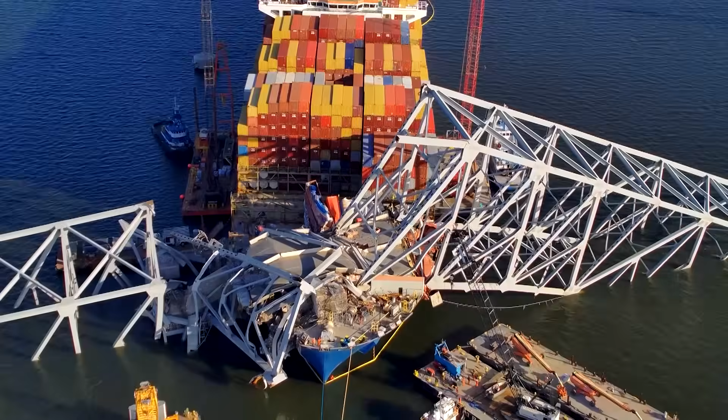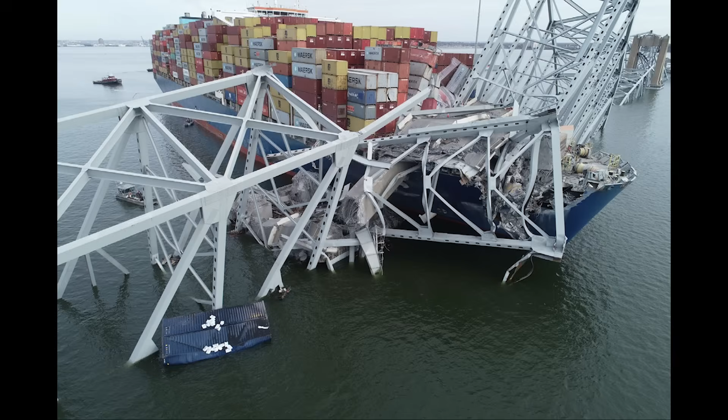It's hard to believe it has been about a year already since the Motor Vessel Dali slammed into the bridge support pier of the Francis Scott Key Bridge in Baltimore, Maryland on March 26, 2024. But people still ask me all the time, what happened to the Motor Vessel Dali? What's its current status? Are they going to rebuild the Francis Scott Key Bridge? It almost seems like a lifetime ago, really.

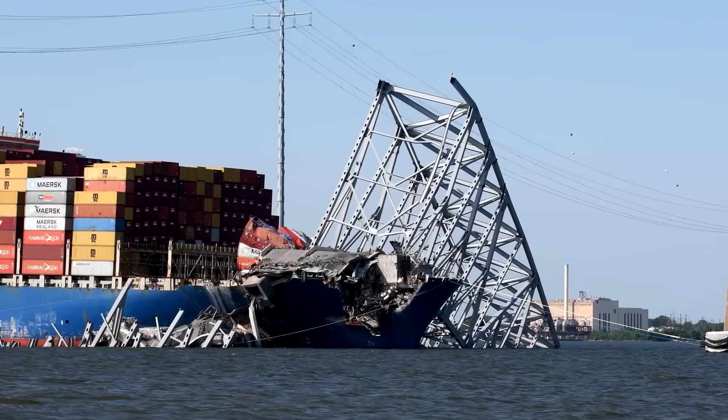First, the bridge came down, and then they spent a month and a half salvaging victims and debris, and then blowing the remaining bridge truss off of the Dali so that they could refloat it.

Hello, look who's here, Dali. This is Louis. Hello, Louis. Dali, this was a great sight to see. So nice to have you back where you belong. I'm so glad to be back. There she is pulling up dockside. You're looking swell. Thank you, Louis. I can tell. Does it show?

So inquiring minds want to know, and I've been getting a lot of comments about this. Today we're going to update three things here. We're going to talk about the Motor Vessel Dali since it left Baltimore, where it's gone and what it's doing now. We're also going to talk about something that came up a couple of days ago. The NTSB had a media briefing and gave some urgent recommendations that affect many other similar bridges right now. Some pretty unnerving stuff in there. We're going to talk about that. And then we're also going to talk about the new Francis Scott Key Bridge. Yes, there is going to be a bridge, and they are rebuilding it. We're going to talk about the design and what's going on right now.

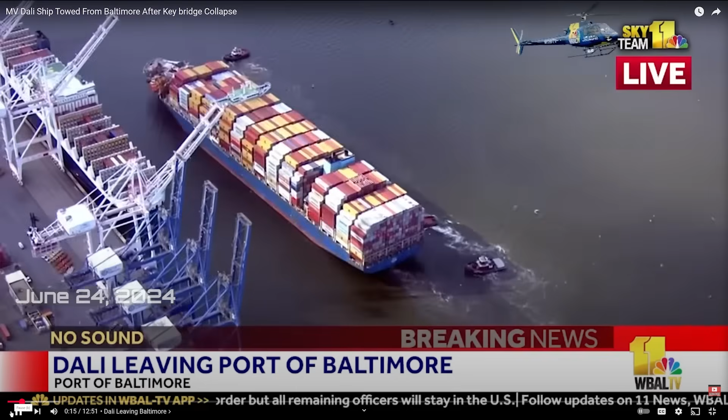Now, as you might recall, the last time most of us saw Dali was on June 24th, 2024, as you can see here, when the Motor Vessel Dali was being towed out of the port of Baltimore. It was going to sail down to the port of Norfolk, Virginia, where it was going to be put under dry dock for some repairs before eventually limping its way to China for a complete rebuild of the damaged section. Right back into the middle of the channel where it all began, where she crashed into that left side bridge pier that was supporting the bridge to begin with.

See, it's just about there now. That tugboat that's pulling it — look right above it, and you'll see the remnants of that bridge pier just sticking up out of the water. Then a few hours later, Dali approached the Chesapeake Bay Bridge. Here's the footage that was captured by Washington, D.C.'s Fox 5 channel from their helicopter. And look at this, another beautiful sunny day out there. Here it is — I sped it up for you as it made it perfectly under the bridge there without incident.

So then the Dali ship, while it was sitting there in dry dock in Norfolk, Virginia, had many of the containers removed, and it was getting prepared to be moved to China. It left for China in September of 2024. Here you can see it on September 19th, 2024, after it was leaving the port of Norfolk, and it was heading over to China. I hope I pronounced this right, because it was heading to a shipyard called Fujian Huadong, in the Luoyuan Bay port area near what they call Fuzhou, China. I hope I pronounced all of that right — forgive me if I got it wrong. But that's where it went to, and it arrived there on November 13th, 2024.

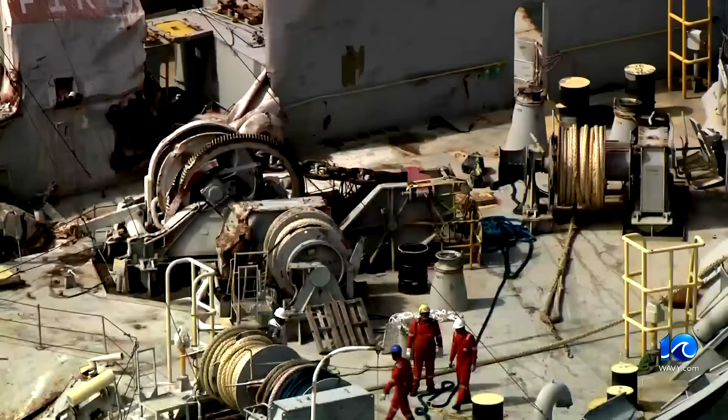Dali looked much emptier than it did three months ago with a bridge sitting on top of it. Holy cow, what a difference a few months makes, huh? So there it is — some close-ups of some of the damage there without the bow covered. You remember the last time we saw it, it had the bow covered. So you can see how twisted and mangled everything is. And man, does it look like a completely different ship without all of those containers. Look at all the damage on the deck. And there she goes — I mean, she's rusting and everything.

So here you can see on January 12th, 2025, it departed the Fuzhou shipyard to go ahead and begin its sea trials. Pretty impressive that they got it done that quick. This video was provided by the Synergy Marine Group, who manages the Dali, and they're based in Singapore.

Now, of course, we know that the insurers settled for $102 million last fall with the federal government. And I'm sure there's still a lot of people now that are suffering that are never going to see a penny from this. So I think the Dali should set aside maybe 5% of their earnings for the foreseeable future until such time that they can pay back all of these victims, like pay into some kind of a super fund or something, in perpetuity even, until everybody has been satisfied. I think that would be the fair thing to do.

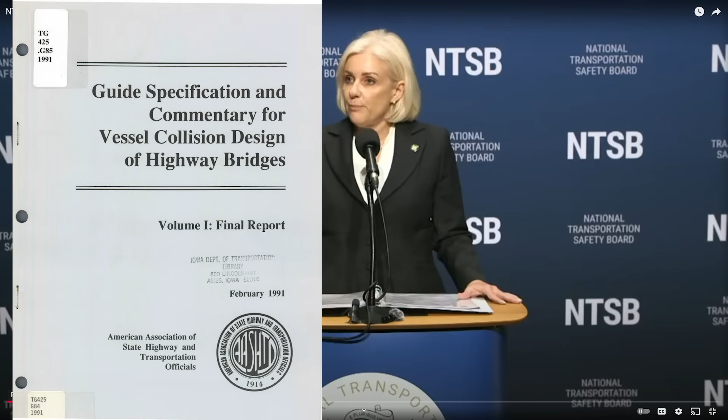State of Maryland was on AASHTO's executive committee at the time and served on AASHTO's highway subcommittee on bridges and structures, which developed those standards in 1991 and revised them in 2009.

Included in the 1991 standards was a recommendation from AASHTO that all bridge owners conduct a vulnerability assessment of existing bridges to evaluate the risk of catastrophic collapse in the event of a vessel collision and take action. All remaining existing bridges over navigable waterways with commercial barge and ship traffic should be evaluated using a vulnerability assessment in accordance with risk analysis procedures contained in this guide.

The Maryland Transportation Authority never ran the calculation on the Key Bridge, and as of October 2024, they still haven't on the Chesapeake Bay Bridge.

Had they ran the calculation on the Francis Scott Key Bridge, the MDTA would have been aware that the bridge was almost 30 times greater than the risk threshold AASHTO sets for critical essential bridges.

30 times greater. What's frustrating is not only did MDTA fail to conduct the vulnerability assessment on the Key Bridge, they did not provide, nor were they able to provide, the NTSB with the data needed to conduct the assessment. We asked them for that data. They didn't have it. We had to develop that data ourselves.

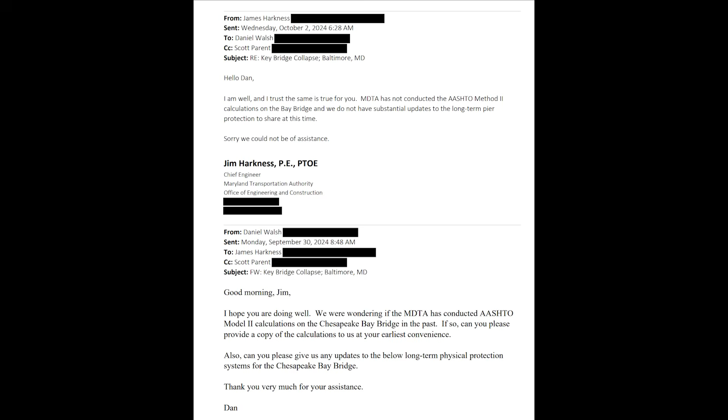Now here's an email that I dug up from the docket, and it shows where the NTSB had requested all of that information from the Maryland Department of Transportation, and their response was that they did not have it. That was some pretty scathing criticism there of the Maryland Department of Transportation, and that puts a lot of blame on their shoulders.

So with all of those engineers there, and I know they're busy, they all have jobs to do, but it's like, so I'm like, okay, what do you guys do all day long there then? What would you say you do here? Well, look, I already told you. I deal with the damn customers so the engineers don't have to.

Okay, so what NTSB Chair Homendy was referring to here is this guide, from the American Association of State Highway and Transportation Officials, otherwise known as AASHTO. That's what we call it in the engineering world. They have rules and regulations on what you need to do when designing bridges. This is a guide, specification, and commentary for vessel collision design of highway bridges.

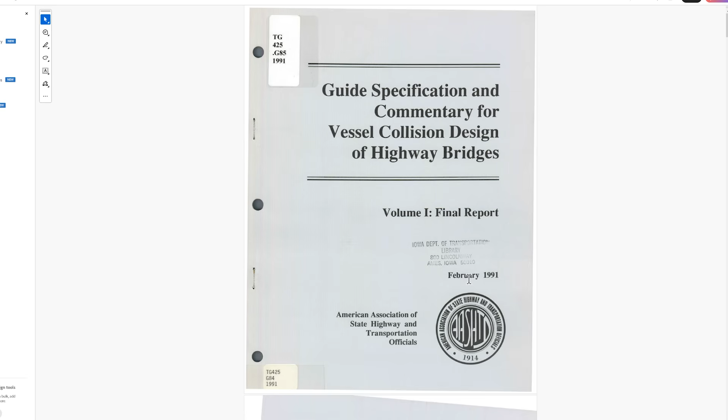This is the version that came out in 1991. There's a later one from 2009 that was updated, but I didn't spend the $162 on it since you have to buy the download. So this is just an older version I found online.

But at least in the 1991 version, if you come down to page 25, this is where it shows the methodology to determine if there's a risk of a bridge collapsing from a vessel collision. It's called Method 2. This is the number you're after, 4.8.3, the annual frequency of collapse, or AF. This is what the NTSB said was 30 times higher for the other bridges.

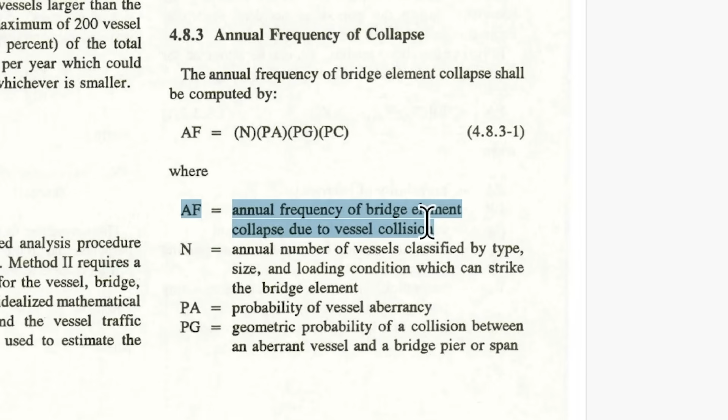Let me show you the definition of AF: it's the annual frequency of bridge element collapse due to vessel collision. This is essentially a prediction of how often you're likely to have a collapse when a boat collides into your bridge, like we saw with the MV Dali when it crashed into the Francis Scott Key Bridge.

So it would have fallen under this calculation, and had they run it, they would have seen ahead of time that this was going to happen. This is similar to if you've bought a disk drive before and looked at the sticker - it'll say something like MTBF, mean time between failures. That's a gauge of how reliable your disk drive is and how often they expect a failure mode to set in. It's similar to that.

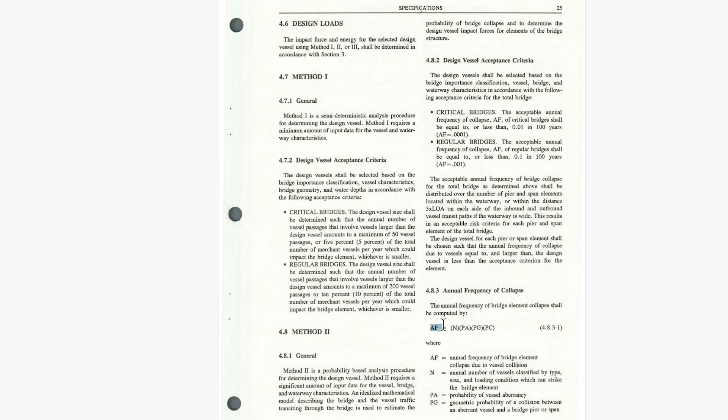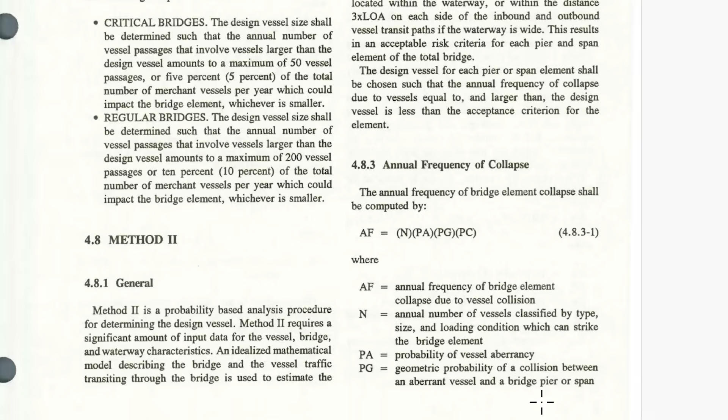They give the formula for how to calculate this annual frequency, and here are all the inputs: the annual number of vessels classified by type, size, loading, probability of vessel aberrancy, geometric probabilities of a collision. There's all sorts of parameters you figure out, but they give you all the formulas needed. This is exactly what NTSB Chair Jennifer Homendy was telling us - that the Maryland Department of Transportation never ran these tests on the Francis Scott Key Bridge.

Not only did they not run the test, they didn't even have any of the data to give to the NTSB to run these tests, so the NTSB had to run their own tests and do the calculations themselves.

You're likely to see this in a lot of states because this came out of nowhere. It caught everybody by surprise - when the Panama Canal increased in size in 2016, suddenly you're getting, pun intended, boatloads of newer ships much larger than the ships of old, than what we had 30, 40, 50 years ago. So all the owners of these bridges need to come in and rerun these calculations based on the new traffic and new boat sizes.

All the owners of these bridges need to rerun these numbers based on the new ship traffic and the size of these behemoth container ships. Some of them can contain almost 30,000 containers, when the average used to be really small, just a few thousand. On March 18th, 2025, the NTSB held a press conference giving urgent recommendations.

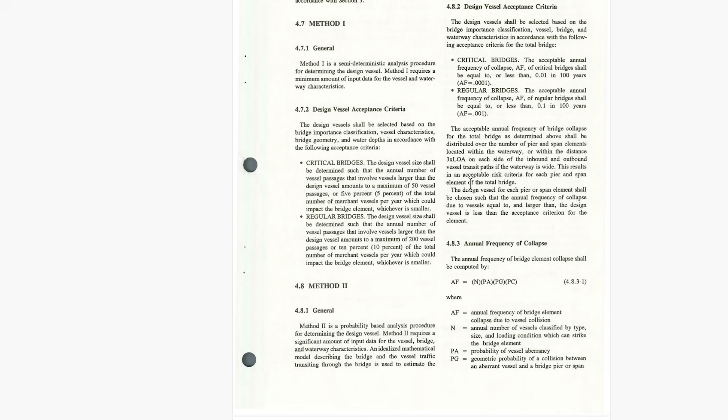The title says it all: Safeguarding Bridges from Vessel Strikes, the Need for Vulnerability Assessment and Risk Reduction Strategies. So basically she's saying they're identifying bridge owners who didn't adhere to the AASHTO specifications and didn't come in and run this annual frequency of collapse calculation.

In their marine investigation report to date - this is not the final report - on the MV Dali collision with the Francis Scott Key Bridge, here are the four piers and the protection dolphins they had put in. As you can see, just looking at the pictures, they always looked too small and inadequate for protecting the bridge.

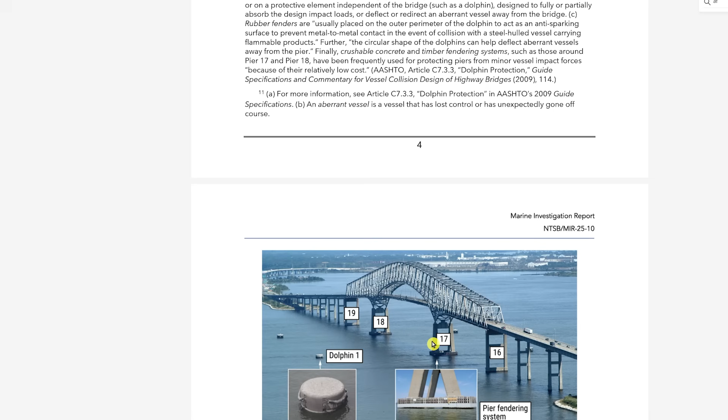And of course, the fendering system didn't do so well either, because with some of these bigger behemoth ships now, the bow can extend way out beyond the bottom of the hull where it meets the water. So you can have these big overhangs that can still come in and destroy a pier.

And here is the overhead view that they showed. Remember when the Dali had crashed into the pier right here, Pier 17? If you look where the Dolphin is, it's 489 feet away from it, and it didn't even stop the ship because the ship never even hit it.

So it was useless. There wasn't enough in place to stop Dali from crashing into Pier 17 right here. And then here's the Fort McHenry Channel, carved 50 feet deep right in the middle of the Patapsco River. In this case, it looks like the MV Dali had pretty much threaded the eye of the needle and scooted right by Dolphin number 1 to hit that pier.

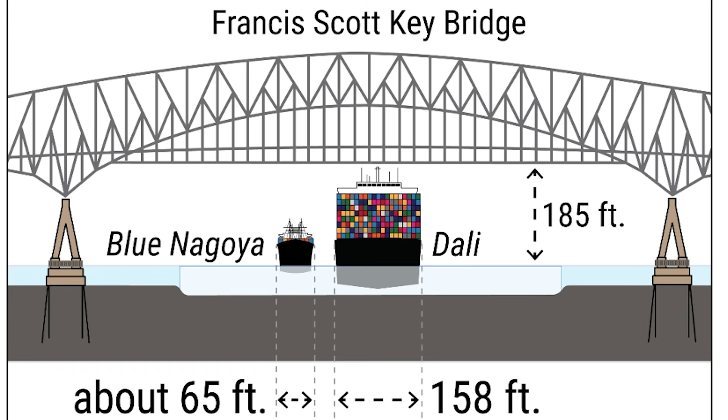Many people might not be aware that in 1980, this ship right here, the Blue Nagoya, had crashed also into Pier 17 at the Francis Scott Key Bridge. But look at the size of the ship here from 1980 compared to the Motor Vessel Dali, what we have today with today's behemoths. And guess what, folks? Dali is not even one of the biggest ships out there. There's plenty of ships much bigger than even Dali.

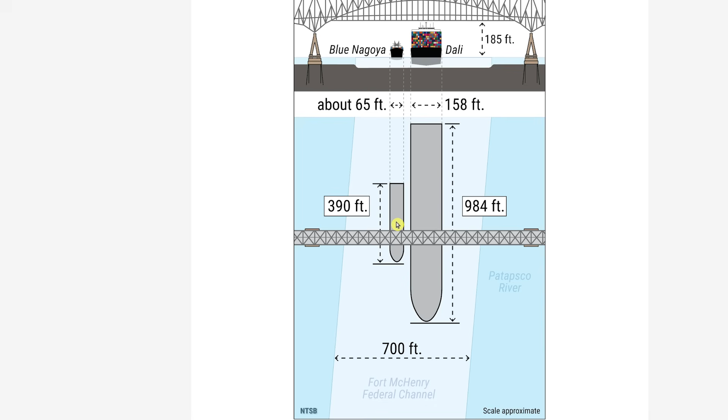But look, here's the length of the ship from 1980. It was 390 feet compared to the Motor Vessel Dali right here, which is 984 feet. Just looking at the Fort McHenry Channel, look how much space the Blue Nagoya takes up here compared to the Dali. It's like, man, it's almost like just being on a dinghy.

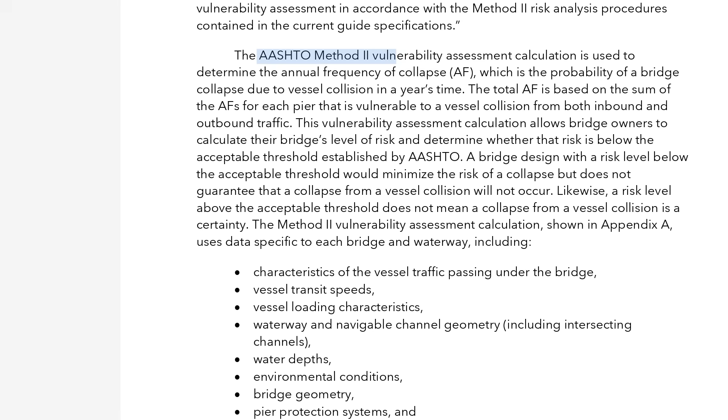Now the NTSB's report kind of just repeats what I was just mentioning a minute ago. So you have the AASHTO Method 2 vulnerability assessment calculation used to determine the annual frequency of collapse, AF. These are all of the inputs that go into all of those equations here, see? That's what the individual bridge owners want to do, is take a look at all of this and generate those risk assessments based on these equations.

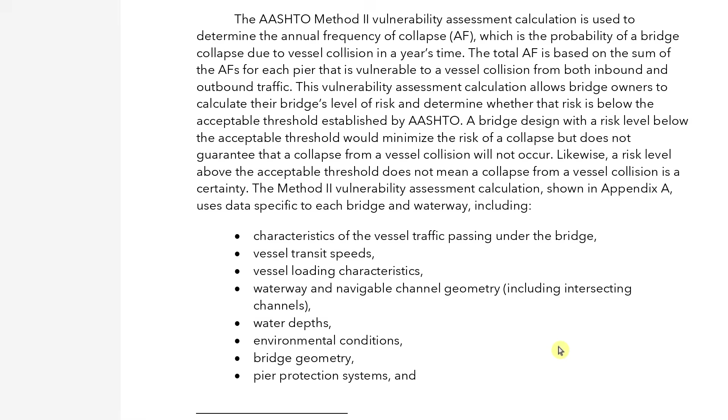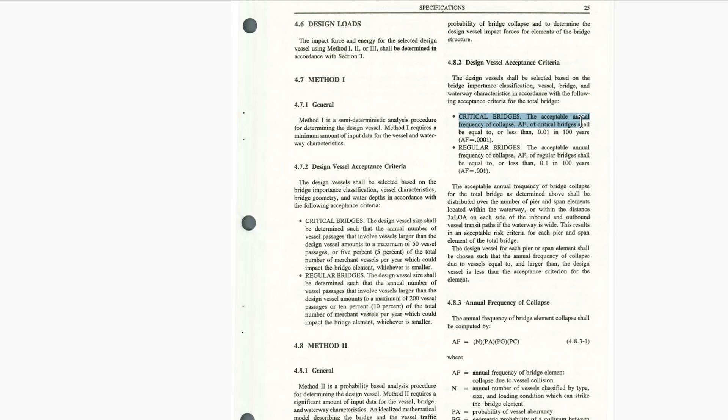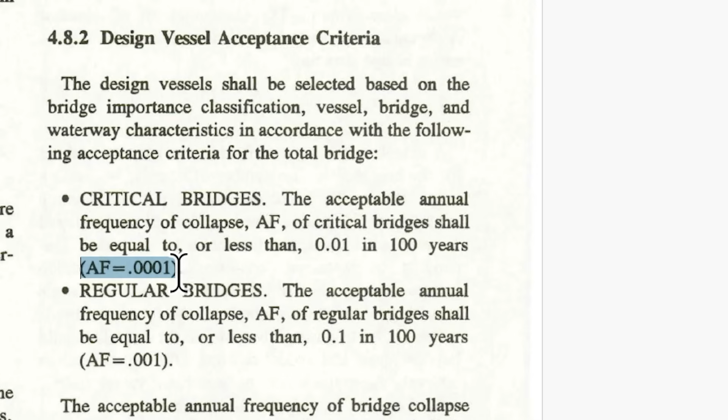A key point they pointed out is that bridges built before 1991 were not required to undergo this vulnerability assessment. So of course, Key Bridge, being built in 1977, didn't have it. Now this is in the AASHTO specification here. It says the acceptable annual frequency of collapse, AF, of critical bridges shall be equal to or less than 0.01 in 100 years. This means we are looking for an AF equal to 0.0001 or less. So that's all we have to do, is make sure it comes in below that.

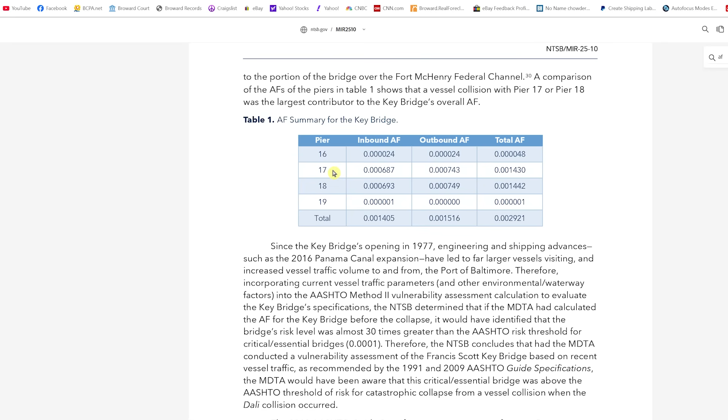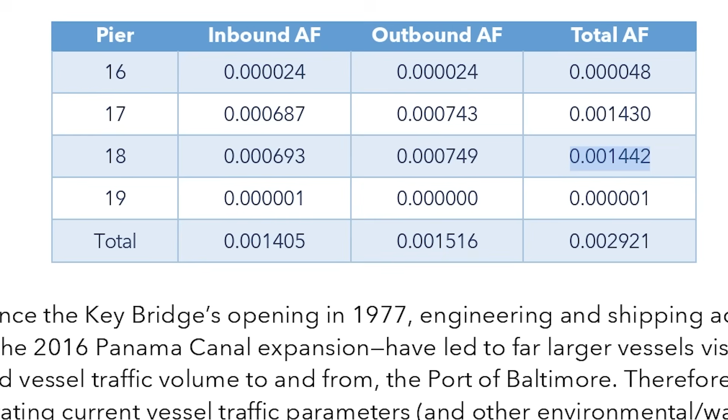So the NTSB published this week the data they calculated for the Key Bridge under these different piers: Pier 16, 17, 18, and 19. Here's the problem. Your total at Pier 17 and Pier 18 is 0.001430 and then 0.001442. And remember, this right here is supposed to be 0.0001. So that's what they were talking about.

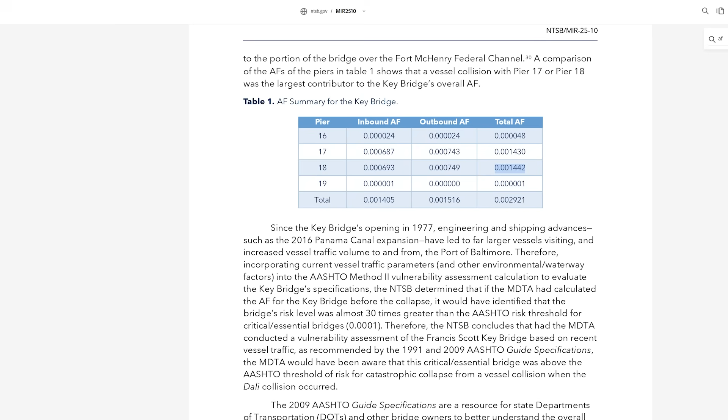Now if you were just some pencil pusher looking at this chart of numbers, you wouldn't even see anything pop out. But you have to know that this number right here is way, way above by many, many magnitudes of what it should be. That's the alarming part. They should have put this in bold and red, these 2 numbers right here, this one up here as well.

And so that's where they're saying right here that the NTSB determined that if MDTA had calculated the AF for the bridge before the collapse, it would have identified that the bridge's risk level was almost 30 times greater than the AASHTO risk threshold of 0.0001. That's what I just showed you on the spec a minute ago.

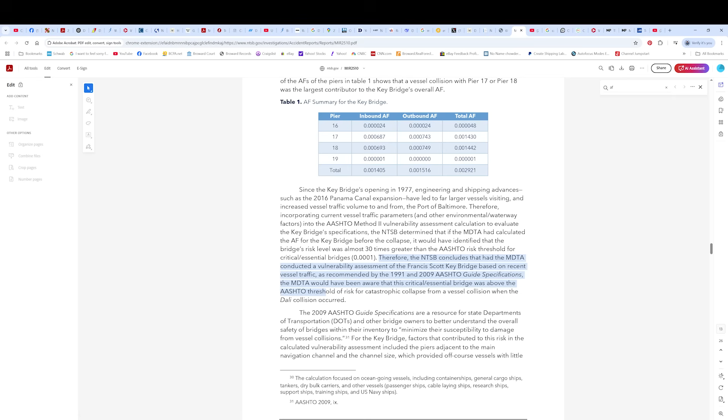So it says here, therefore, the NTSB concludes that had MDTA conducted a vulnerability assessment, they would have been aware that this critical essential bridge was above the AASHTO threshold of risk for catastrophic collapse from a vessel collision when the Dali occurred. So what the NTSB is saying now is that the Maryland Department of Transportation should have known that the Francis Scott Key Bridge had an issue, that it was at risk and overdue for a collapse, statistically speaking, and that they should have been able to do something about this. This is part of the reason why we're in this position today.

The 30 owners of 68 bridges over navigable waterways frequented by ocean-going vessels are likely unaware of their bridge's risk of catastrophic collapse from a vessel collision, and the potential need to implement countermeasures to reduce the bridge's vulnerability.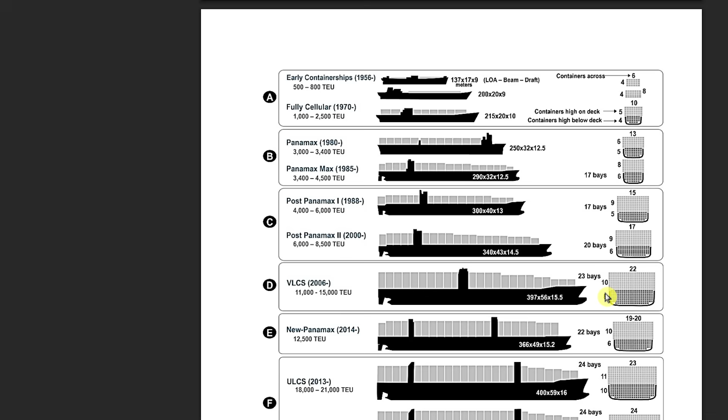And look at this, the MV Dali falls under this category right here, the new Panamax. As big as the MV Dali ship was, folks, guess what, there's still two classes more up. And I thought I heard there was another class they've come out with even beyond this one. I have to find out, dig more into that. But this kind of gives you an idea for just how big.

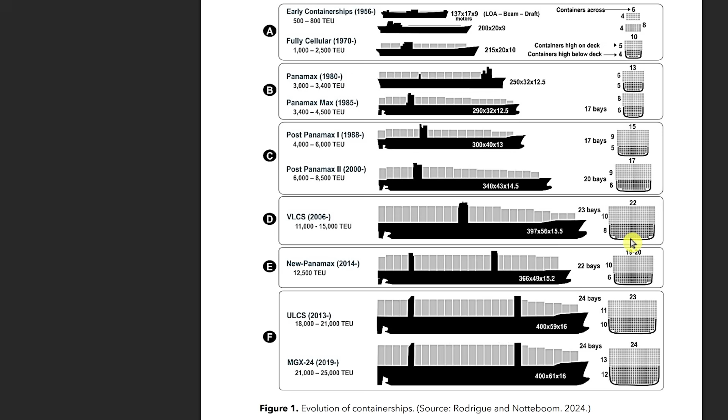Remember, mass times velocity, that's your momentum. M1v1 equals M2v2, remember that formula from physics? I remember going through that formula when I was a senior in high school. A big boat like these are going to pack a lot of momentum when they crash into a pier. And this is why, in my opinion, the best way to stop a behemoth like that is forget about trying to bolster up the piers themselves. I think it's going to tear through no matter what.

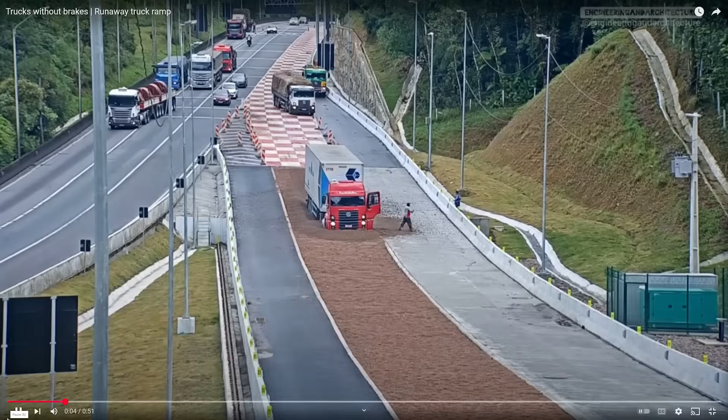You've got to stop the boat from ever getting to the pier, either with massive dolphins or you create a big beachhead around it so that if the boat's going to come in, it's going to hit the beachhead instead. Kind of like those trucks that go up those runaway ramps, like in Colorado when you're going out skiing, you'll see these trucks sometimes run out of control and they'll go up a runaway ramp, which is basically a bunch of rocks that help slow it down.

Also, they could form the seabed underneath the bridge, right? You could form it so that the ship would just sort of beach itself underwater even without having to build a whole bunch of rocks up on top as well.

Okay, so let's take a look at this list that the NTSB put in the appendix. These are 68 sort of well-known bridges that have not been assessed and need to be assessed to determine if there's anything wrong. That's why they have the classification on here as either typical or critical and essential. And here's a bunch in California.

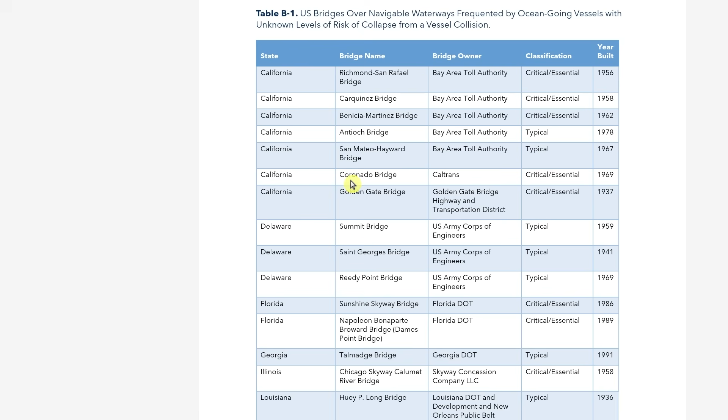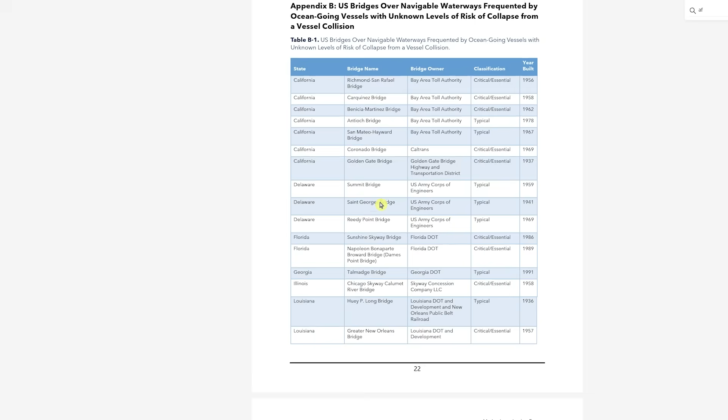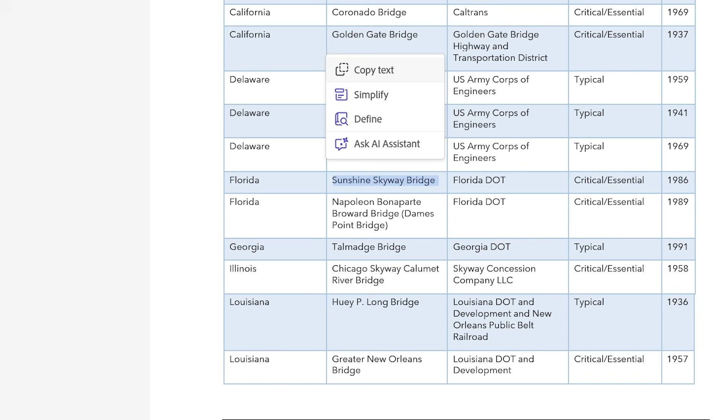But anyway, here's some of the other ones. And this one surprised me here in Florida, because here's the Sunshine Skyway Bridge. Now that doesn't mean that it's in danger of collapse or anything, it just means that these are all major bridges that were built before 1996. And anything before 1996 is suspect, because now we don't know what protection is around it. And a lot of these massive ships that have been created over the years have gotten much, much bigger since the 1950s, 1960s, and 1970s.

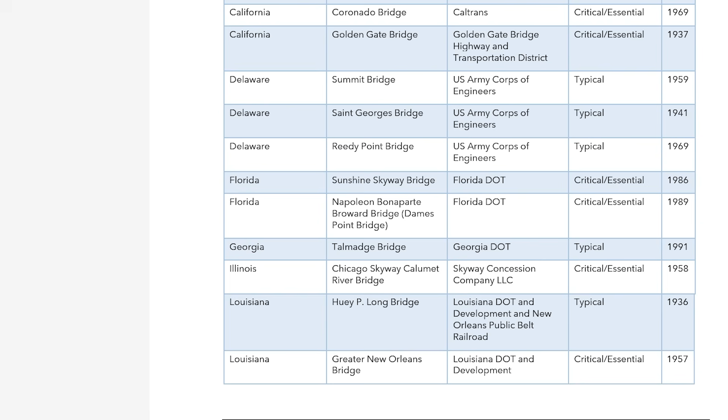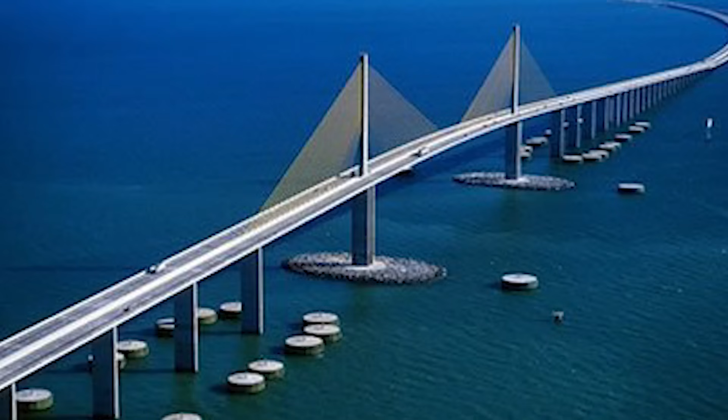I profiled this Sunshine Skyway Bridge last year during several of my videos on the MV Dali collision with the Francis Scott Key Bridge there in Baltimore. And you remember I used it as the gold standard because of the way they had all of those dolphins arranged, and the way they have all of those rocks creating like a little beachhead to prevent ships from colliding into any of their pylons there. It'd be interesting to see what their calculations come out to be. And then as you go down here into the other states, you can see others like Louisiana, Maryland.

Now here in Maryland, the Bay Bridge hasn't been done yet either, and that's the one that was real critical that they were talking about at the meeting, the Chesapeake Bay Bridge.

And then in Massachusetts - oh, that's my home state. I'm from Boston. And look at this, man.

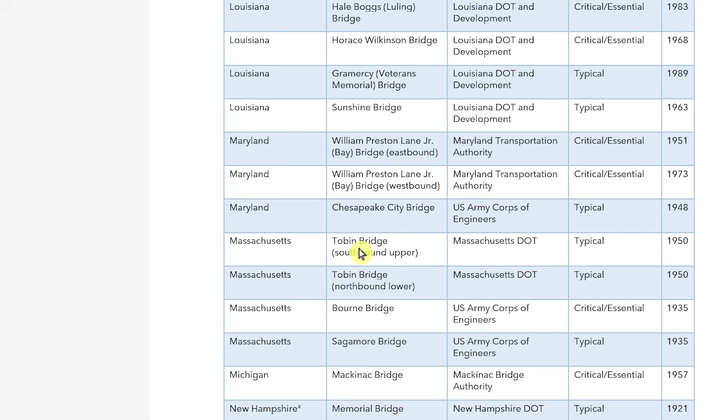The Tobin Bridge in Boston, north and southbound. You got the Bourne Bridge and the Sagamore Bridge, which connect Cape Cod over the canal to the mainland. If those bridges go down, I can't even imagine how bad life would be. So looking at this list, it looks like the NTSB is giving Massachusetts an ultimatum.

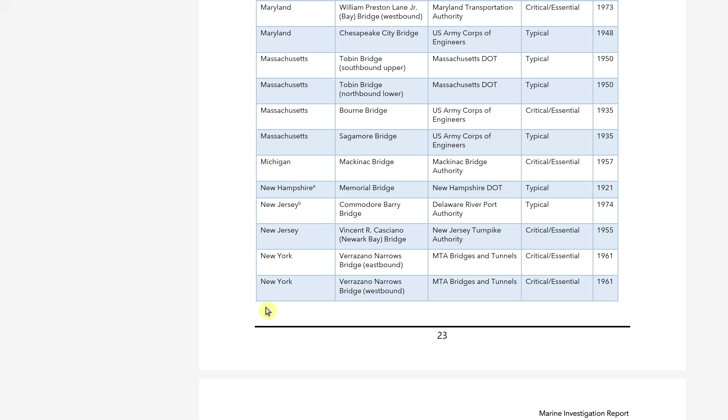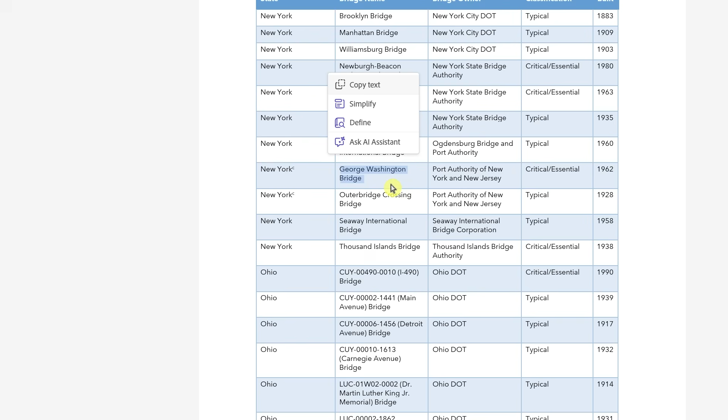And then in New Jersey, we've got some big ones: the Newark Bay Bridge, the Verrazano. And in New York, you've got the Brooklyn Bridge, the George Washington Bridge, and all of these. So some high-profile bridges are potentially at risk here due to collision from a vessel.

So unless they go ahead and run this AF calculation that the NTSB has been talking about, we could be in trouble, and we need to head this off now while we can. Had the Maryland Department of Transportation done this with the Francis Scott Key Bridge, they surely would have identified that the Key Bridge fails this test, and they should have put more protection around those piers.

And then rounding out the list are Pennsylvania, Rhode Island, and Texas has quite a few also, Washington and Wisconsin. So there you go - there's your list of 68 bridges that the NTSB is saying should have their calculations done to see if they are at risk for collapse after a collision with a ship.

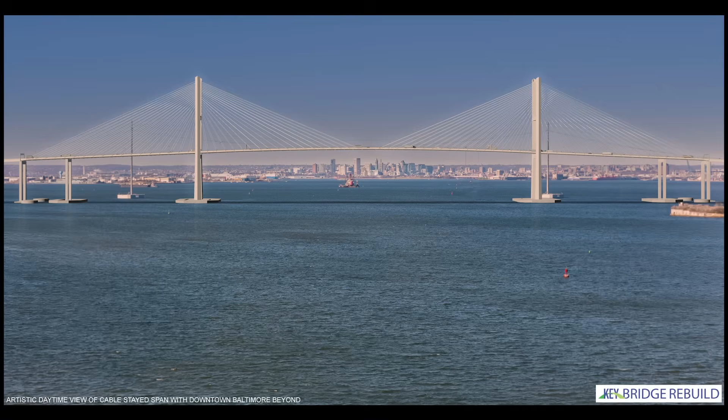And now for an update on the Francis Scott Key Bridge rebuild. Yes, there is a new redesign, and I'm going to show you that. We'll go over it here. Thanks for putting up with us so far - I know we had a lot of information to give you before this because there's been so much going on. But there is a redesign, and they're in the early stages right now of the construction. So let's take a look at what we've got so far.

Okay, so the process to rebuild the Francis Scott Key Bridge actually began with this document here on July 19th, 2024, last summer. This was four months after the MV Dali had collided with the Francis Scott Key Bridge in Baltimore, resulting in its failure.

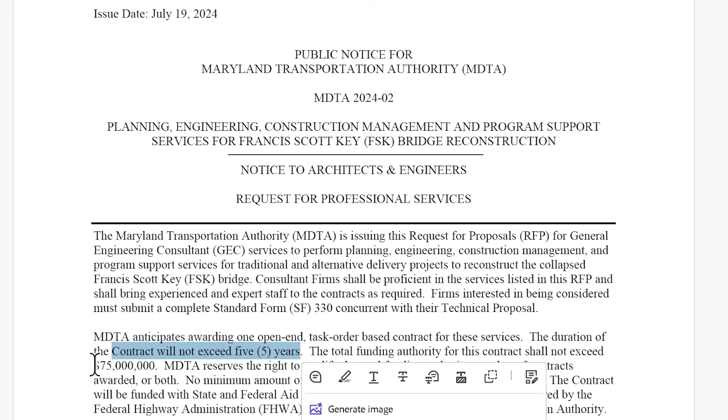Right here it says they're issuing a request for proposal for general engineering consultant - most people in the engineering world know that as GEC. They're looking for general engineering consultant services to perform planning, engineering, construction management, and program support to reconstruct the collapsed Francis Scott Key Bridge. The contract will not exceed 5 years, and the maximum they can spend on this is $75 million.

So whatever entity wins this bid has to understand they have to get all of this done with $75 million for their services. Then about a month later, on August 29th, MDTA announced they have a winner for the contract, and it went to Kiewit Infrastructure Company. They are the progressive design builder that will undertake the complete design and construction of the I-695 Francis Scott Key Bridge replacement, and it was confirmed over here on their website.

Now I want to show you what this progressive design means, because it's a pretty cool way of doing accelerated bridge design. In this case, looking at the Francis Scott Key redesign, a conventional bridge build will go like this: you'll have design, then engineering takes place, then permits after engineering is done, then soil testing, and then you start construction. So you have a longer timeline. But with progressive design build, everybody is together at the same time.

It's not a design entity or architecture firm throwing it over the wall to an engineering firm who then deals with somebody else who does the permits and all that. All of these people are acting together under one contract. Now here's the surprising part for you: did you know you can actually start the construction phase of the project before the design's even done? How can you even possibly do that?

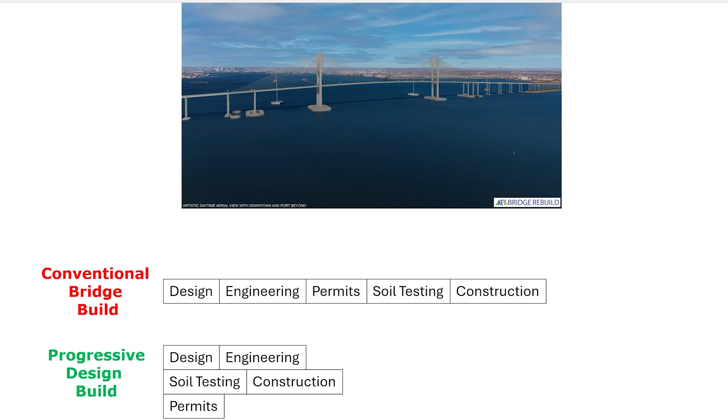So you start this now, and they can characterize all the different core samples of soil that they've taken from everywhere, from under the riverbed to on land to wherever else they need to get soil samples, and they'll know ahead of time what they can do. That way, the engineering and the construction sort of take place at the same time. They can design the piers first, and that way they can start building the piers and then engineer the rest of it from there. So a lot of this can happen at the same time, and you can see how it shortens the timeline dramatically.

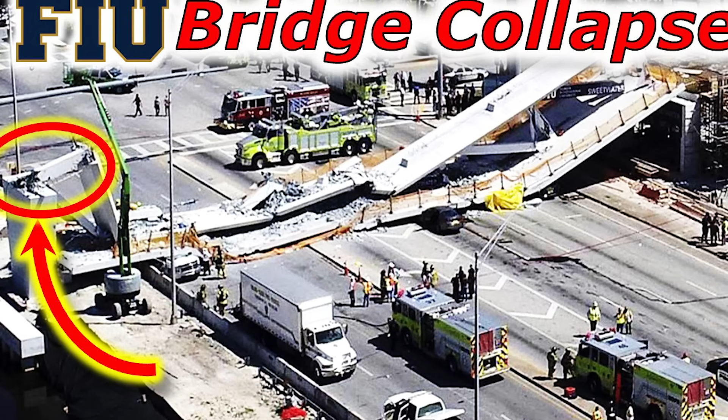Now, if you recall on the video I made for you about a year ago on the Florida FIU bridge collapse that killed several people, I showed you the hierarchy here, and it's very similar.

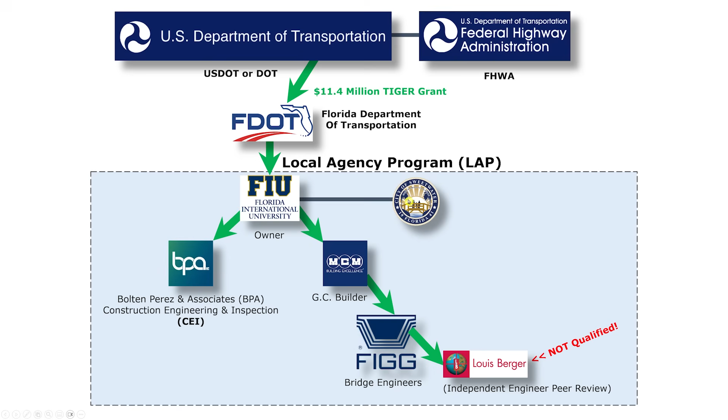Their GC builder was MCM, and FIGG Engineering did the design. Then they had this company, Louis Berger, who was supposed to be an independent peer review. And then there was Bolten Perez, who was the CEI, the Construction Engineering Inspection. These companies are usually supposed to be completely separate, not having any financial interest, because they're supposed to look over their shoulder and find anything that's wrong. But it didn't work out too well for FIU, because FIGG Engineers had too much power, and not enough of these other players spoke up in any of the meetings when cracks were found in the concrete.

This is like the problem NASA had with the Space Shuttle Challenger when it exploded, that not enough people spoke up ahead of time, people who had reservations about whether they should launch.

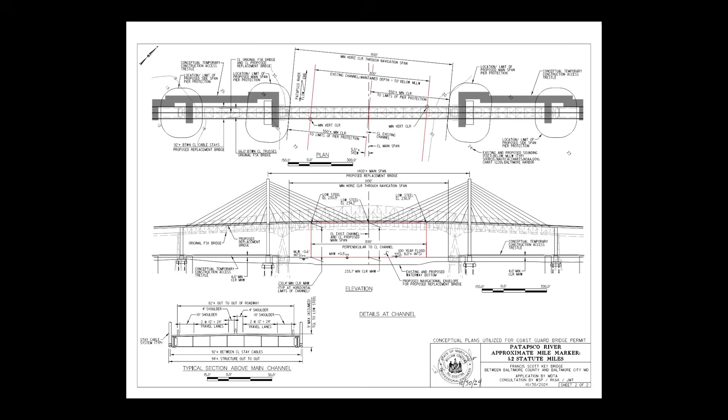So on November 9th, 2024, the Coast Guard had posted this picture. This is the conceptual plans for the Coast Guard bridge permit being pulled at the time, giving us a closer look at what's going on here.

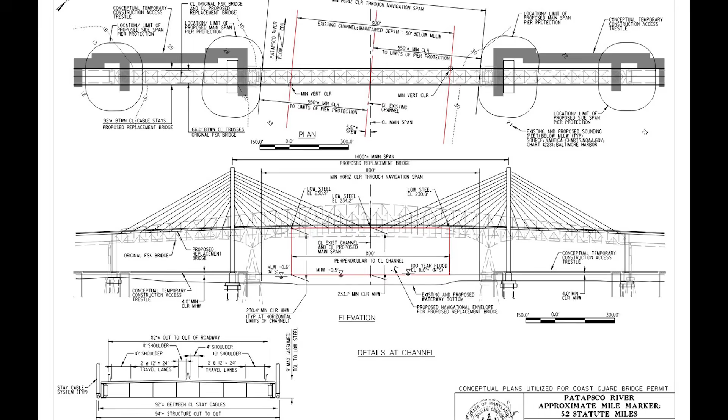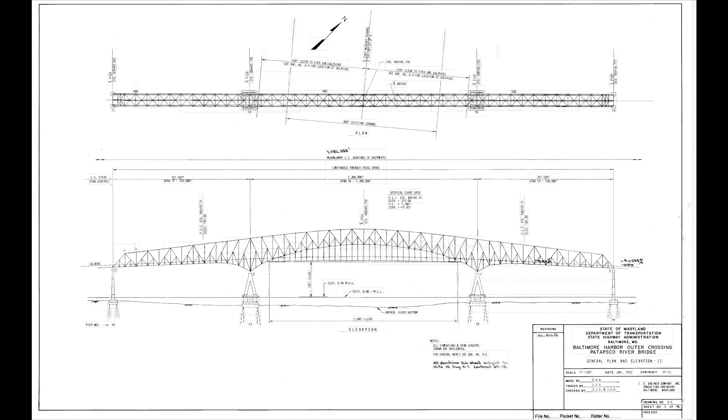It looks like a cable-stayed bridge design, as opposed to the continuous truss design of the former Francis Scott Key Bridge. For reference, here's the original schematic for the original Francis Scott Key Bridge.

Now I want to take a close-up look at this and show you what's going on, because if you look carefully, they overlapped the old drawing of the old Francis Scott Key Bridge right here behind it. You can see it there, that lighter gray color.

Right off the bat, you can see the notable differences that the towers are going to be further apart, and you can see they want to widen the channel to 800 feet. I believe it was 700 feet before. I don't know if that means they're also going to dredge underneath the bottom to reshape this to be wider as well.

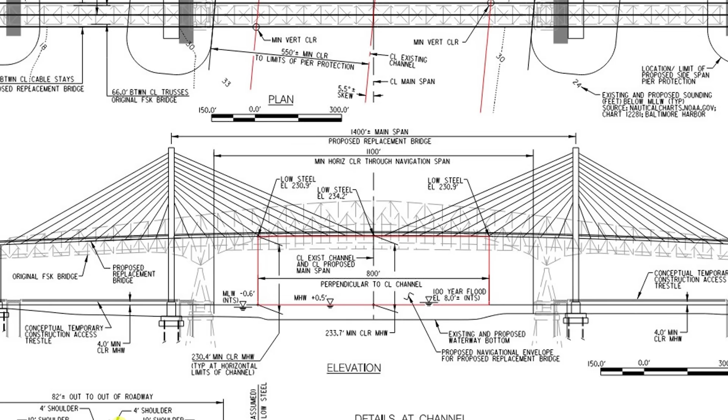Then here they're showing the typical road section. You're still going to have the same 2 lanes on both sides, so it's a 4-lane road, with the shoulder in the middle and the sidewalk off to the side. Then this over here is the bird's eye view looking straight down on the bridge.

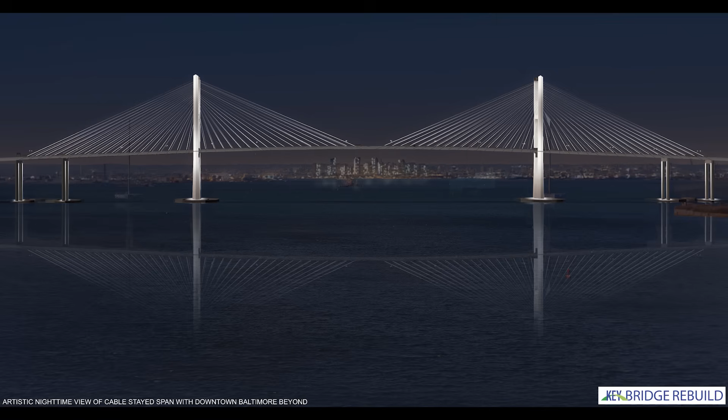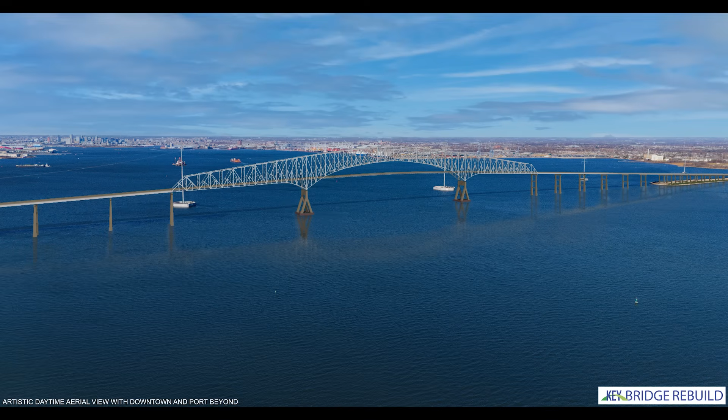And then here's another angular view in the daytime, and there's what the new bridge will look like, somewhat of a wider channel as well. Although I don't know that 100 feet is going to buy us a whole lot. And there's what it looks like at night, too.

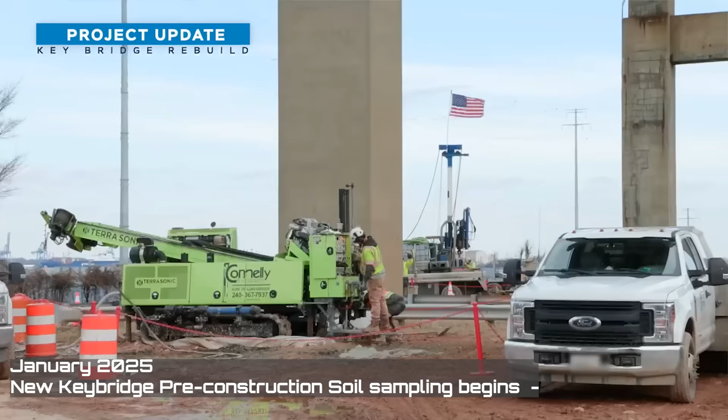We'll begin other activities that include demo and the beginning of trestle work. We're out here taking surveys on the ground, underwater, and now we're taking surveys under the ground. That data is critical to getting the right kind of design.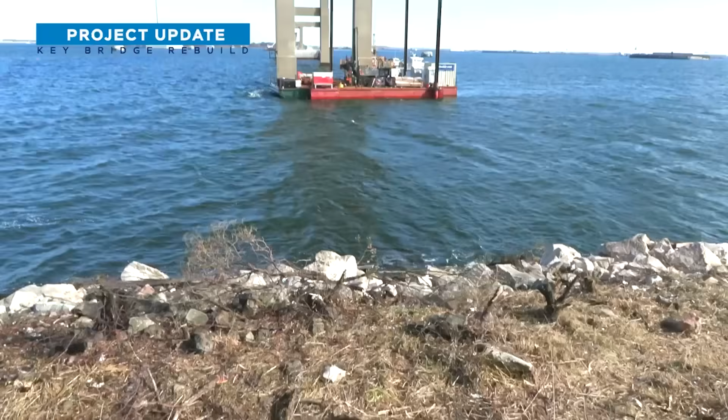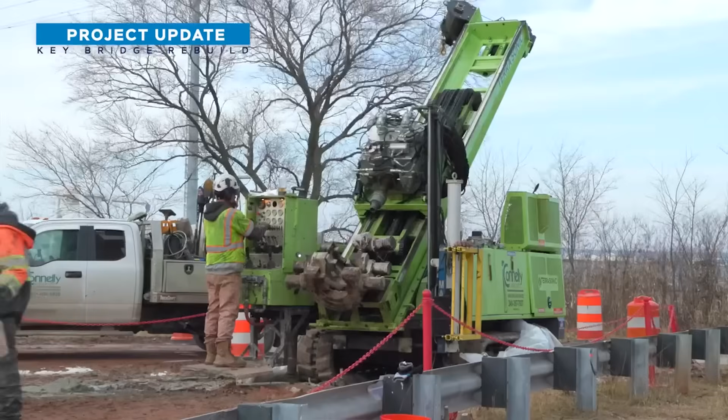So the rigs behind us, these barges have drill rigs on them. Those folks are out there running the drill rigs, drilling down beneath the water. That gives us the information that tells us how to design our bridge foundations so we can hold up this new bridge. With this survey equipment, we basically trailer it in when it's on land. There's engine noises, and a little bit of vibration hammer sometimes, depending on the rig.

It's going to be isolated to the areas around the bridge here. We hope that there's not too much disturbance for the residents at this point.

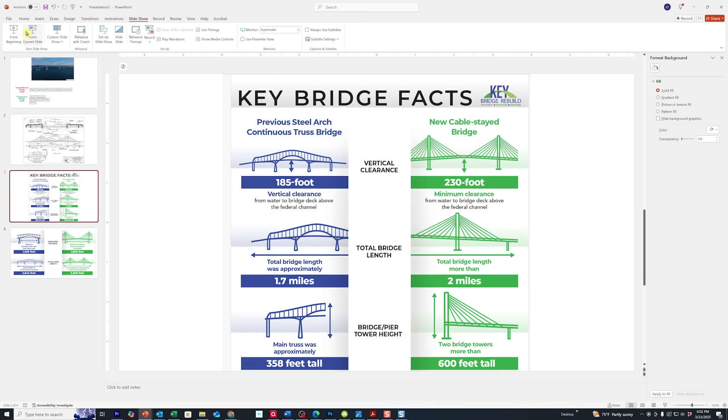Now let's compare some numbers between the two bridges for our new Francis Scott Key Bridge. The previous bridge was a steel arch continuous truss bridge, 185 feet tall from the water to the road. The new cable-stayed bridge will be 230 feet tall, a difference of almost 50 feet in vertical clearance.

The total bridge length was approximately 1.7 miles before; the new bridge length will be 2 miles. Previously, the max height of the main truss was 358 feet tall at the top.

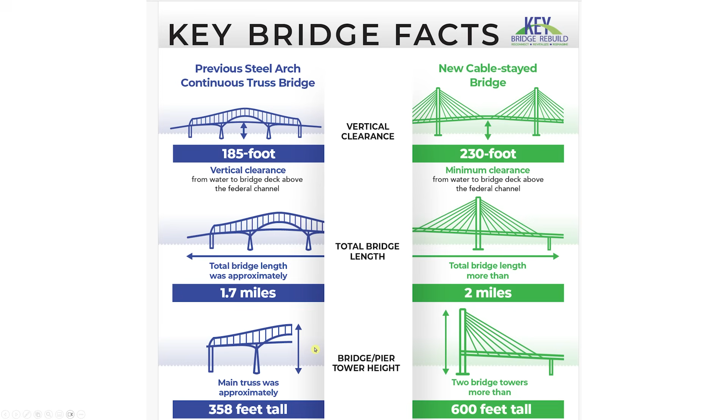Now the new tower is 600 feet tall. Looking at the main span distance, before we had 1,200 feet going across to the piers between 17 and 18. Now that distance is going to be 400 feet wider, 1,600 feet.

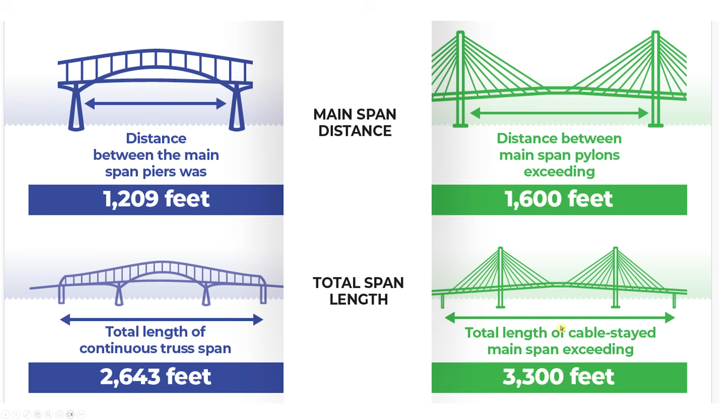As I showed you a few minutes ago, the channel is being expanded from 700 feet wide to 800 feet wide. The total length of the continuous truss span was 2,600 feet before, and the new cable-stayed main span will extend 3,300 feet.

It's pretty cool to see that at least they finally started, so they can get all these early things done and make the project go a lot quicker. Now, looking at the design, I do have a couple of points of contention, something I think they could have done better. What do you think about this?

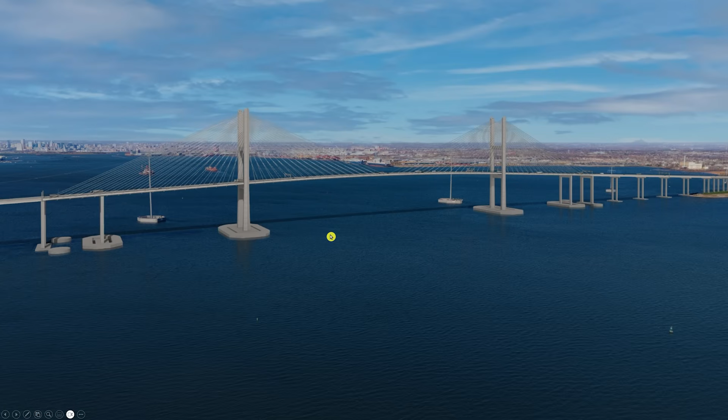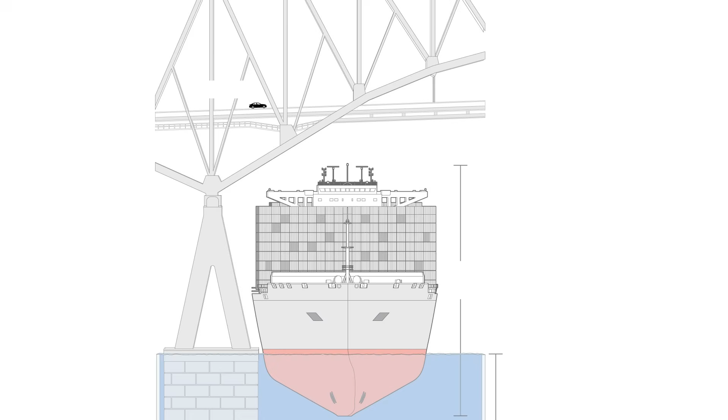My only problem with this conceptual design is this: you still have islands there to protect these towers, and I'm not convinced these islands are strong enough. The other issue is what happens when a large ship comes up against one of these islands and the overhang from the bow still reaches over the island to make contact with the tower. You'd be right back in the exact same position as the Francis Scott Key Bridge collapsing all over again.

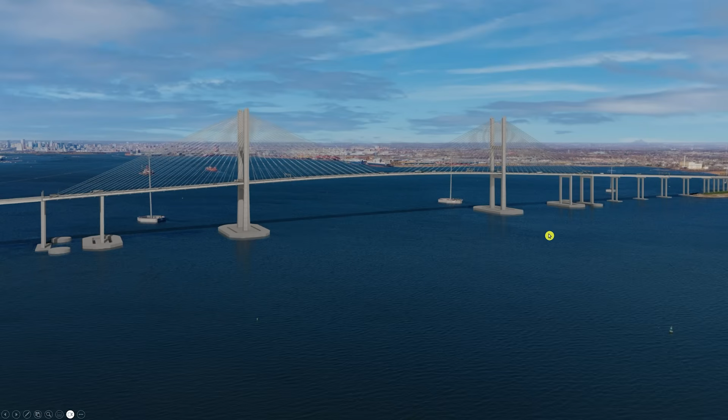Of course, I know this is just an artist's rendition. They're not showing all the dolphins that would have been placed here, but there should be rings and rings of dolphins around all of these.

One other issue I have is instead of going through all this rigmarole with all these towers and piers, why not put both towers on land? Have this tower way over on this side, and this tower over on the other side on land, with the entire span going all the way across. This makes the most sense to me. Put both main towers on either side of the channel.

That way, it doesn't matter because the ships can't even get to it at all. You don't even have to worry about protection, or even run your vulnerability assessment, because it's a non-issue. I know this can be done—look at this massive cable-stayed bridge.

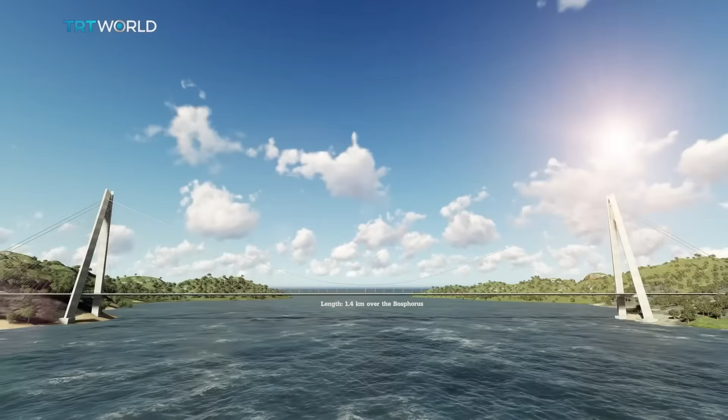This is the Yavuz Sultan Selim Bridge over the Bosphorus Strait in northern Turkey. Piers are on both sides of the land, and it stretches 1.4 kilometers over the Bosphorus. Look how this giant tanker has no worries going under this bridge. Any ship can pass through without a worry in the world, even if a wild storm blew them off course, because both towers are on land and you can't possibly hit them.

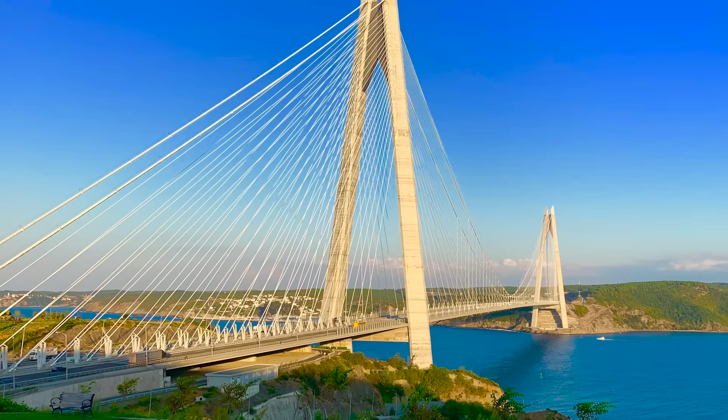As the construction progresses, I'll give you updates from time to time. I'm glad you stayed this far into the video—I know we had a lot of information to give out.